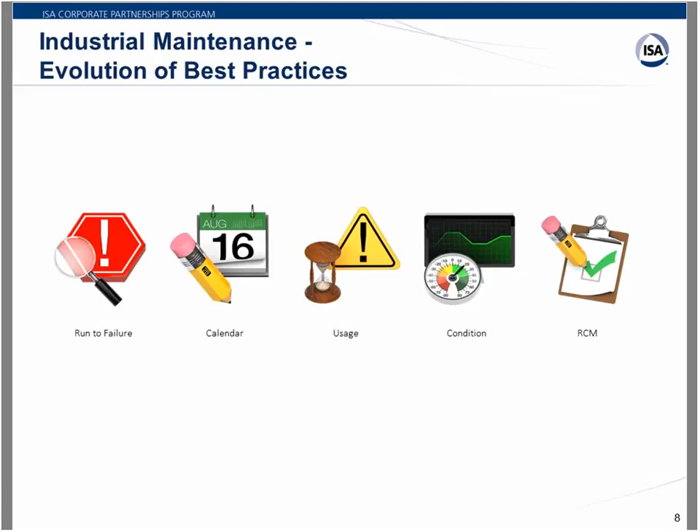And then you have the reliability-centered maintenance, which is a very thorough, very professional consulting engagement for an asset. It's proven to be effective. But I will maintain that all these fall short of the goal. And the goal for anybody running an operation with assets is to have those assets never break down in an unpredicted fashion, because it's very disruptive. Well, to date, that has not been achievable.

All right, so just some observations from other companies. Boeing has gone public saying that 85% of the equipment fails in spite of calendar maintenance.

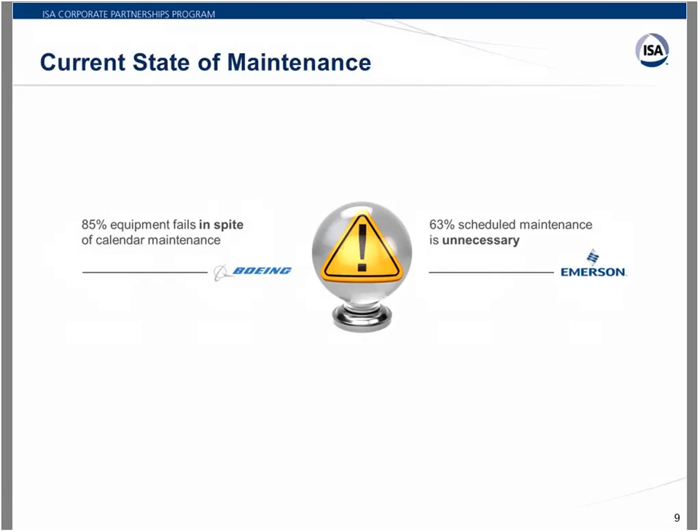Emerson's gone public saying 63% of scheduled maintenance is unnecessary. So you're scheduling it, but you're over-maintaining it because either the usage isn't there or the asset's not ready for it. So lots of room for improvement.

So along came advanced analytics back about 10 years ago, and it showed a lot of promise. There's some downfalls to it though, and this was my experience when I left back in 2014. This is what was available, and some of you attending may have experienced this and maybe haven't seen what's new out there.

But basically, the downfall with historical advanced analytics without any artificial intelligence embedded into it is, it takes modeling. So you got to determine what's the best statistical model to use and method. That took a data scientist, and the data scientist was heavily dependent on a domain expert of the asset to be able to guide them to what's normal and what's not.

Both those individuals are usually very hard to get a hold of, they're very in high demand. So scheduling their time is difficult, and it takes up a lot of time. And then when they're done, you got to configure a pretty complicated rules engine to take their findings and put it into a product.

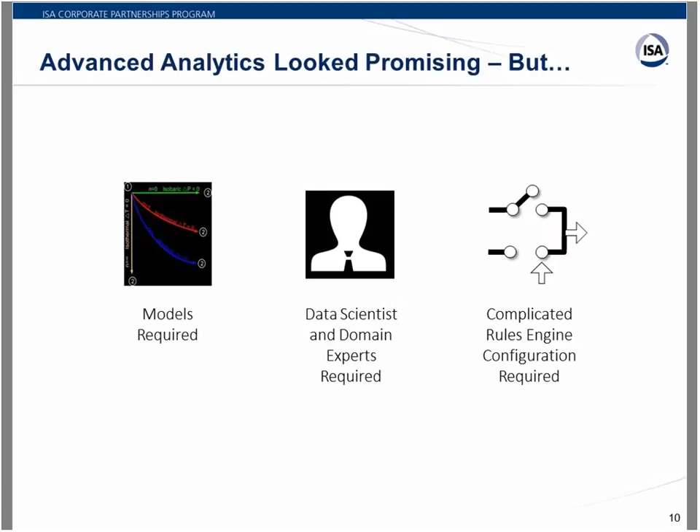All right, so pretty interesting, but has a lot to be desired.

So here comes our first polling question. I'm very curious to know if any of you have tried a preventive maintenance solution in the past, or if you're currently using one. And then if you have, how satisfied are you? Do you think it's met its ROI to date? I'll give you about a minute here. I know in my previous experience, a lot of times these predictive maintenance solutions have fallen short.

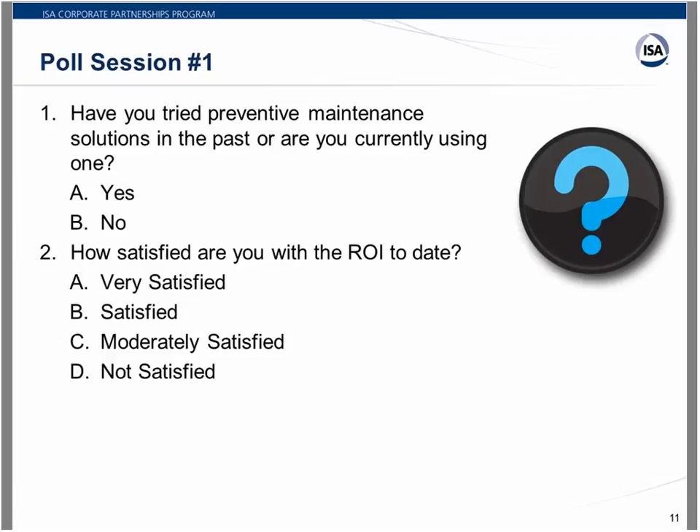And there we go. Interesting. So, yeah, I think that's pretty much par for the course there. So very good. Based on that, I think you're going to be very interested in what I have to say in the coming slides.

Okay, so let's talk about change enablers. There's been a lot of change in this arena. So what's driving it? Well, the obvious one is just the competitive natural forces that's in all of us who's in business. That's why you're attending this webinar. I would think you're trying to find ways to be better, to get a leg up on the competition.

The software vendors and solution OEMs that develop these predictive maintenance solutions are no different. They're always looking for the next way to get one up on the competition. So there's a continuous drive to be better, quicker, faster.

Then you have the whole Internet of Things, and the Internet of Things, it's real. So just think about it. The sensor networks are so much better, faster, robust, secure now. All sensors pretty much come standard, ready to be plugged into a sensor network. So networkability of those sensors is much quicker. Smart devices, all the instrumentation nowadays, panel meters, flow gauges, whatever, they usually come with the Ethernet port on them, where you just plug them right onto the industrial Ethernet network of a facility, pull data back.

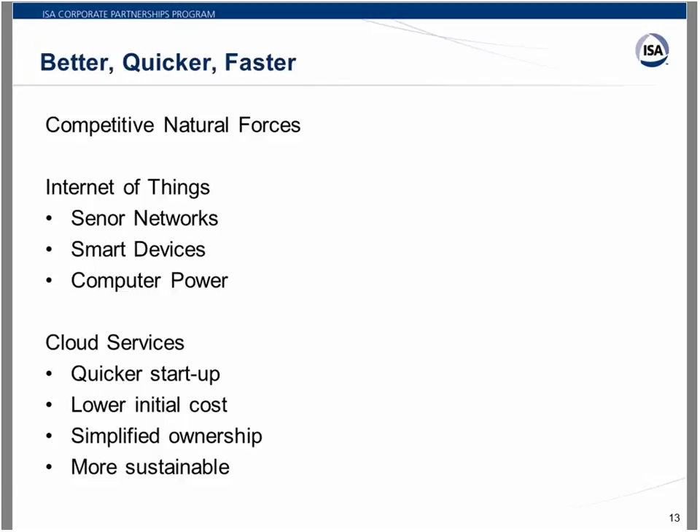You take that and you couple it with artificial intelligence. So the technique that we're going to be focused on, and has been the deliverer of the evolution I'm going to talk about here, is machine learning. Machine learning, if you don't know much about it, is the top AI technique used in advanced analytics.

When the young, bright data scientists come out of universities nowadays, machine learning is the number one technique they have in their back pocket to go apply to the world they're about ready to enter. And the number one contribution of machine learning for predictive maintenance is pattern recognition. We'll talk about why that's so important in a little bit.

And to give you some insight, this machine learning technology is used by Google for their self-driving cars. It's used in all the voice recognition software, the contemporary voice recognition software, Siri being, I think, the most recognizable one. It got its teeth cut in credit card fraud detection applications.

And this next bullet is what really surprised me. This isn't a few global conglomerates, the big analytics companies, who have these in a vault—when I say these, the algorithms, the AI machine learning technology. On the contrary, it's publicly available in the public domain, and all the data scientists coming out of universities have it in their back pocket.

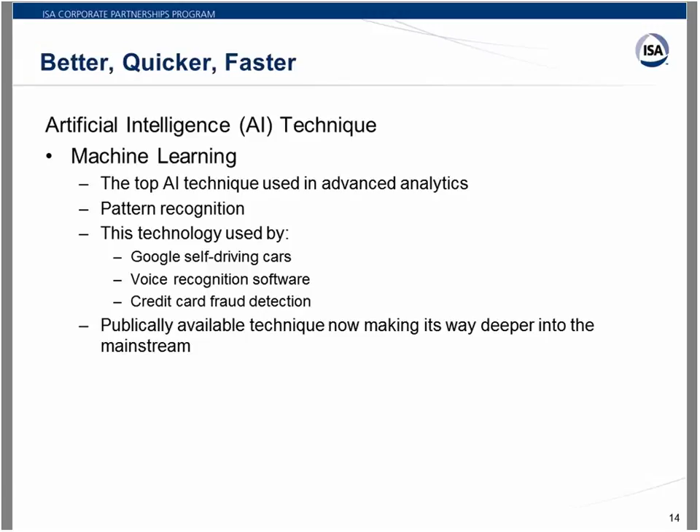If you do a Google search on it, you'll find a Machine Learning for Dummies book with algorithms published right in the book. So it's just amazing. This technique is making its way into the mainstream in a big way, and it's here now. Which leads us to the next evolution.

With AI, as it makes its way into predictive maintenance, it's here now—these solutions are available today. With these solutions, you don't have to determine the data model; it does it for you, or determines the actual statistical model to be used. You don't have to have a data scientist and a domain expert studying the data to figure out where the anomalies are.

It self-discovers the anomalies. And thanks to software as a service and other bundled solutions, there is no rules engine to configure—it's done for you. So it's a much simpler way, and it's a way that will give you richer results than what has ever been achievable before.

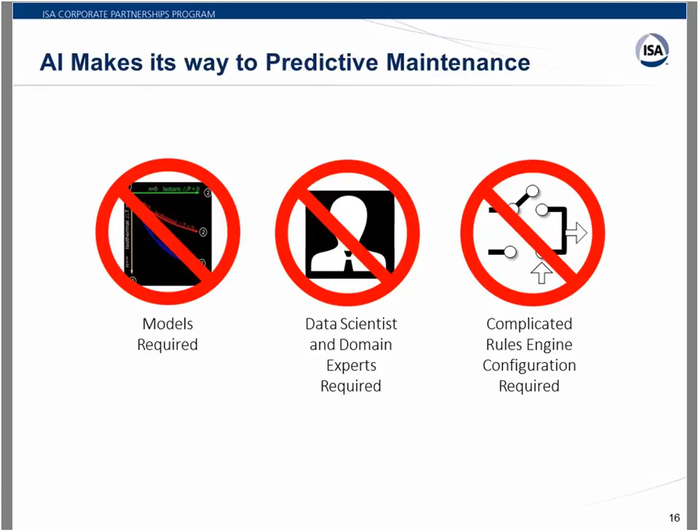These sensor streams are typically brought into what's called a process historian—a platform out there, OSI Pi, AspenTech IP21, Factory Talk Historian, Proficy Historian. If any of those names ring a bell, that's what the historian, the process historian layer, is doing. It's taking that sensor data in and time and date stamping it.

Then you have the maintenance records and the maintenance history. That comes from the computerized maintenance management system, or CMMS, as it's called. These are like the Maximos, the SAP PMs of the world. Avantis is another one that's popular out there. So it takes the maintenance records of an asset.

What is the work order history? It goes out and finds the corresponding sensor data for that work order time and history, and the past data leading up to that work order. It combines it, analyzes it, and then presents it when a predictive event is detected.

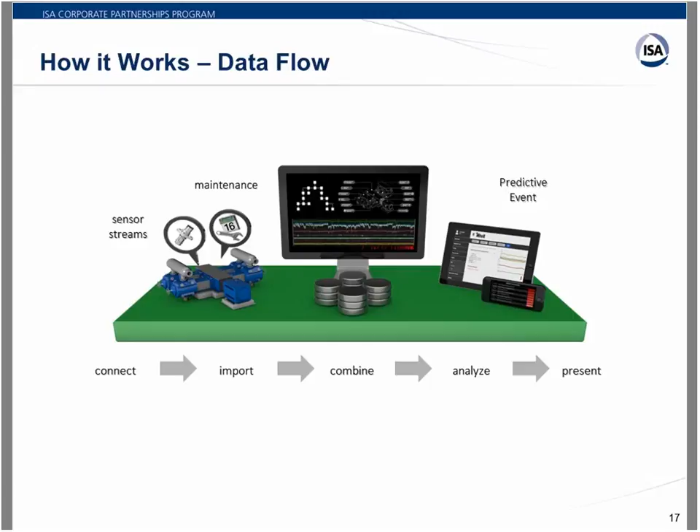Hopefully that's easy to get your heads around as to how that happens, and we'll talk about it a little bit more in the coming slides.

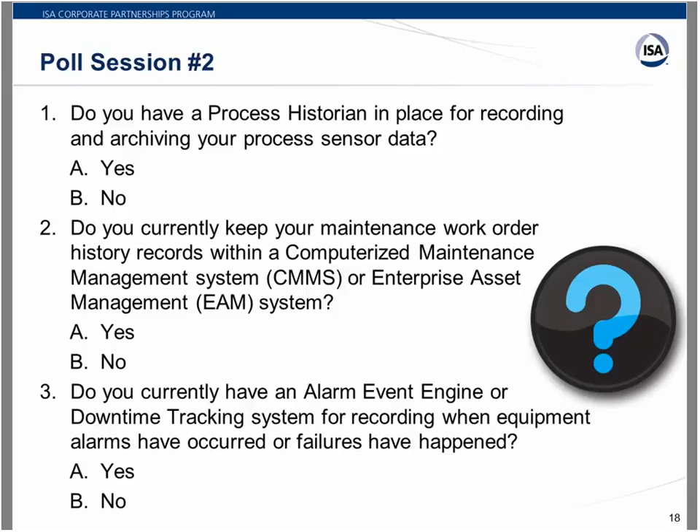Okay, so just going the next level deeper as to how this works. So you have agents, and the concept of an agent has been around. The traditional advanced analytics solutions have this, but this takes it to the next step. You have these agents, and they're autonomous. So you have two types of them. You have a failure agent.

This is an agent that watches for a pattern that's already been identified, based on historical data, as a recognized failure condition. And then the real...

...differentiator here, in my opinion, is the anomaly agent. So now you have an agent that continuously monitors the data signature of the asset, and it's looking for an anomaly. It's looking for a pattern that's not known. So it's not normal, and it's not within the recognized failure patterns. It's something outside of those known patterns. And that's where you have the continuous learning of an asset. All right, it's key.

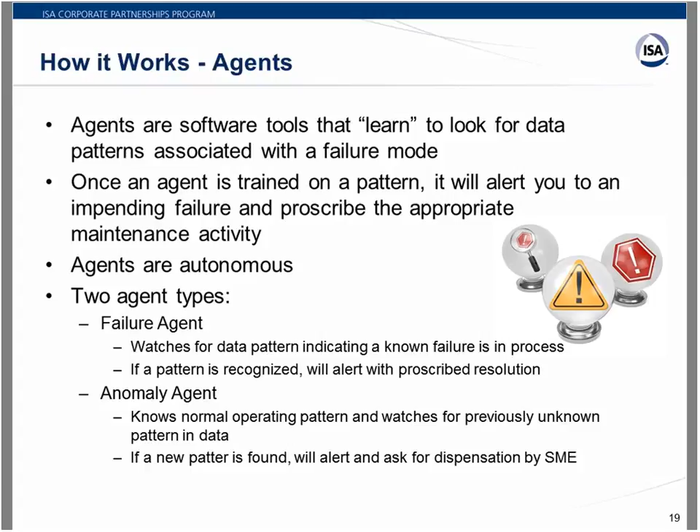So going back, next level down for how it works: the technology has to learn the patterns. What it does is go back into that work order history or downtime history, and the more history you have and the more events that are the same throughout that history, the better. This particular example is showing that the data shows two instances in history, once in 2013 and again in 2014, where this occurrence, this downtime disruption happened. So it takes that and learns from that data.

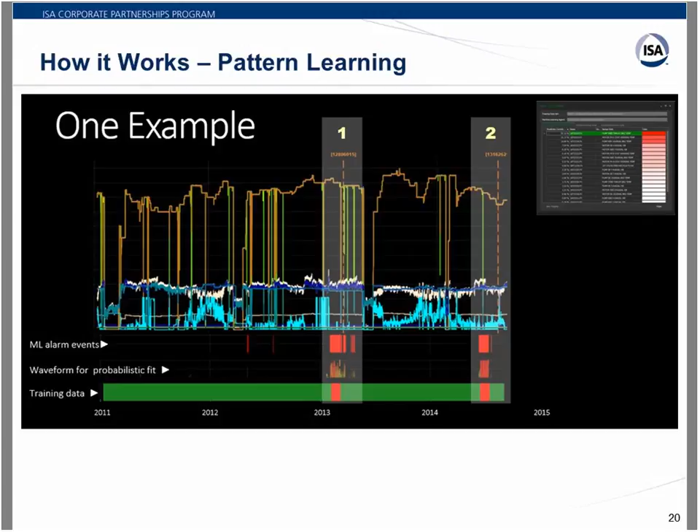And then from there, it can watch for that data, and there are simulations that will test it to make sure it repeats the pattern it will detect. The exciting thing is the advance of the detection. There's up to a 30-day notice that this technology is capable of giving.

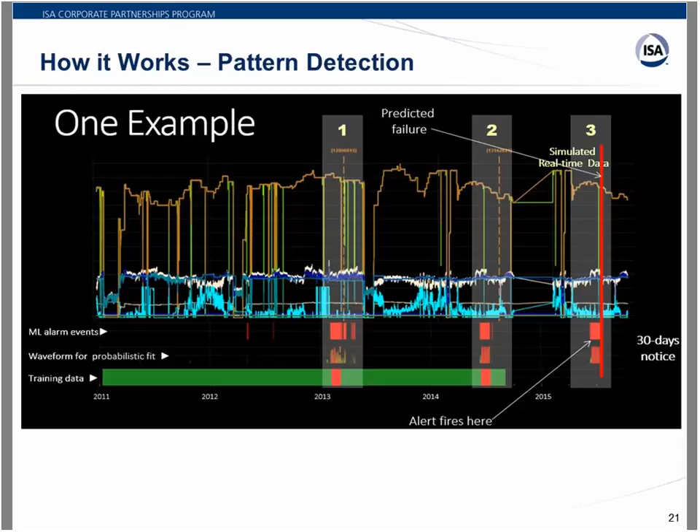Absolutely phenomenal. So if you look at why these agents are important: the old way is a single sensor. This is the maintenance paradigm of condition-based maintenance. You're looking at a sensor, waiting for it to tell you when it's ready to go.

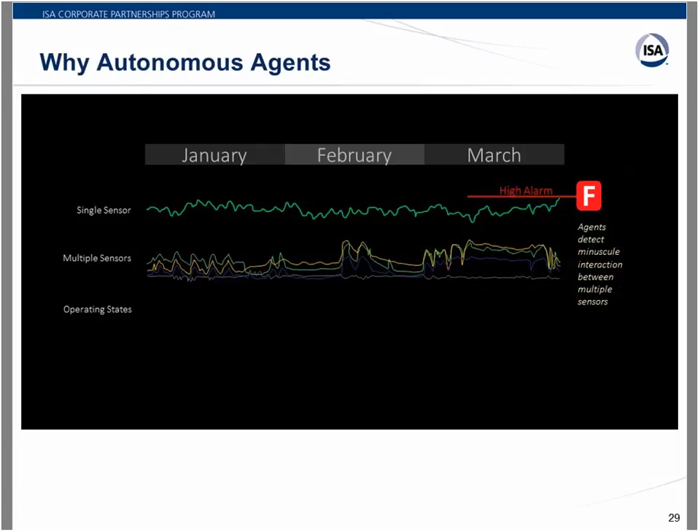But with anomaly agents, you can look at multiple sensors and detect minuscule interactions between them. And that's what gives you the advanced warning. And if you want to close the loop, you can actually tie this technology into your maintenance management system to automatically issue a work order.

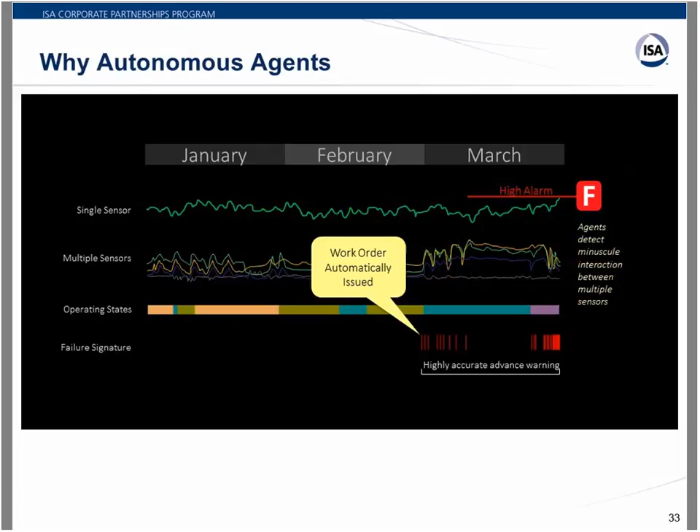So think about it. What does that mean? Well, the sooner you can detect, or the earlier you can predict a failure, the less costly it is going to be to repair it. If you're waiting for it to get close to failure mode or into failure mode, you're most probably disrupting your operations, stopping production in an unscheduled manner.

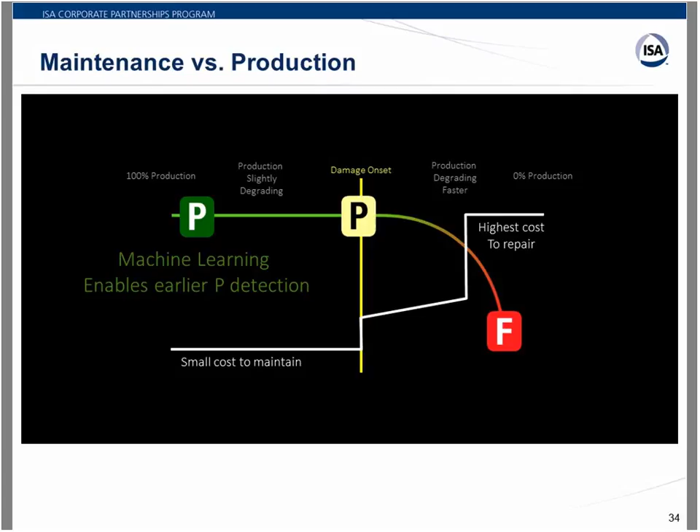You're most probably expediting parts, maybe even expediting a service provider to come in and help fix it, or maybe the original equipment manufacturer—all very costly. Just think if you could have a 30-day window as to when that's going to happen. Well, now you can schedule it and get everything staged, and life becomes far easier, as I think you would agree.

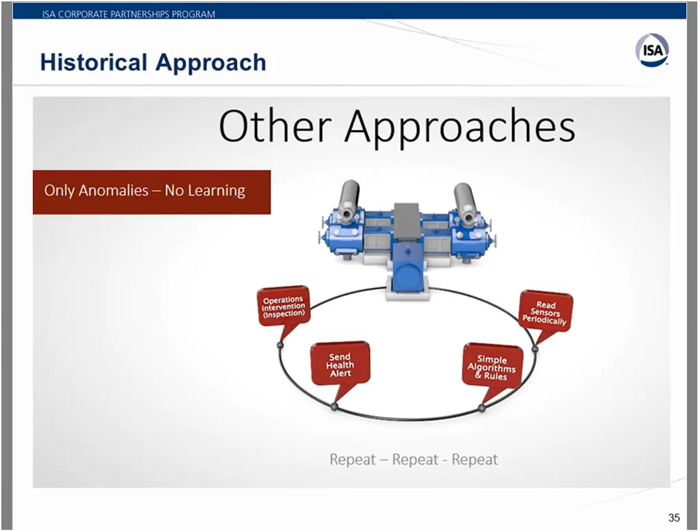Okay, so staying with the historical approach: the traditional way is you develop an agent, and it just continuously looks for one pattern—one pattern that the data scientist and domain expert has discovered—and it's going to sit there and monitor for a known, fixed set of data patterns. All right, that's cool, it's got value, but there's an evolution.

Next, there's a better way yet. When you look at the machine learning difference, now it's continuously monitoring for previously learned normal. So it's always looking for normal, making sure that the asset is in normal operation.

Then when it sees a deviation from normal, it starts comparing against known failure signatures. So if you have a known failure signature, you have sent out an alert well in advance, and operations can intervene in a timely fashion. So you're fixing a small problem before it becomes a really big problem.

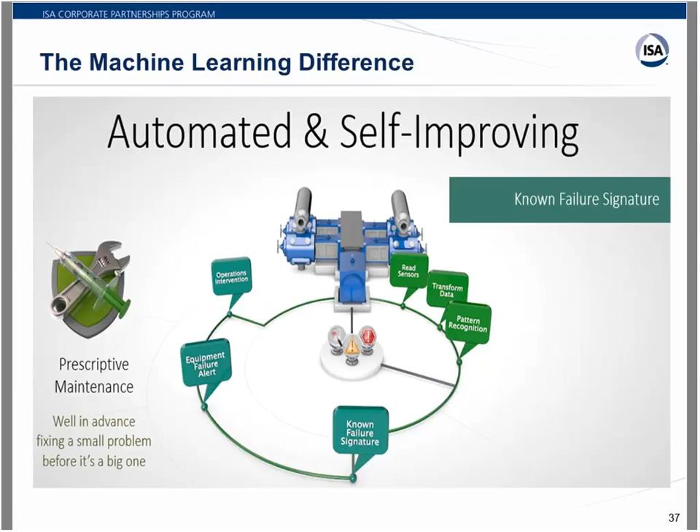But get this, it gets even better. Now with this anomaly agent, it's sitting there and it's looking for unknown anomalies. When it sees one, it sends out a health alert and requests an inspection.

So an asset expert, usually someone in maintenance or an asset reliability engineer, will go out, take a look at that asset, and confirm that it's something unique that could lead to failure, or maybe it's just a new operating pattern and it's fine. If that's the determination, which this illustration is showing, then they just retain that pattern as a normal operating pattern.

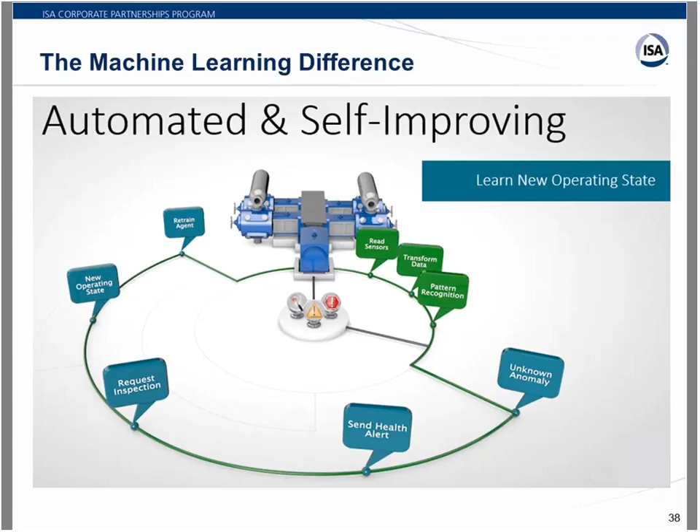But now, what happens if it determines something? The asset specialist goes out there and finds out, hey, this is something new, and yeah, this is going to lead to failure. And this is going to be a new failure pattern to add to our library that the agents can continuously monitor for.

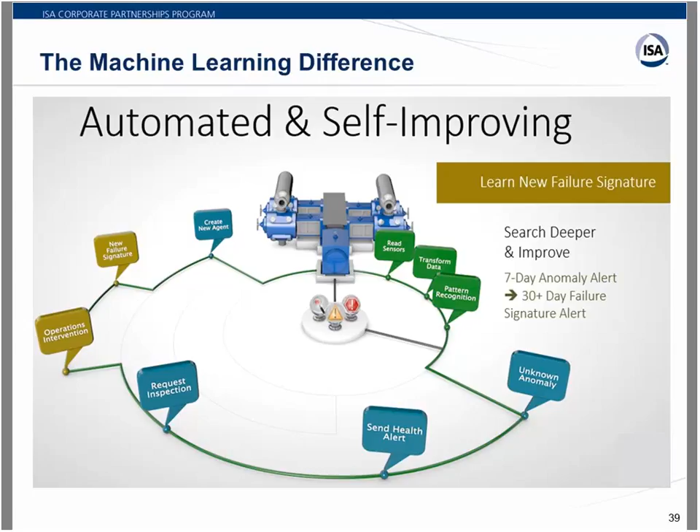And the cool thing is that this is giving you a 7-day alert. Once it's defined as a known pattern, you'll get a 30-day failure signature alert from that point moving forward. But you can see how this technology allows you to continuously learn and get better at this predictive capability.

So you can deploy as many of these agents as the technology detects signatures on. Each failure signature requires a new agent. The cool thing about this technology is you can also go upstream and downstream of the process of your sensor stream. So now you can look at the incoming effect of maybe material or flows, or the downstream conditions. You can cast a wider net for these data agents to look at.

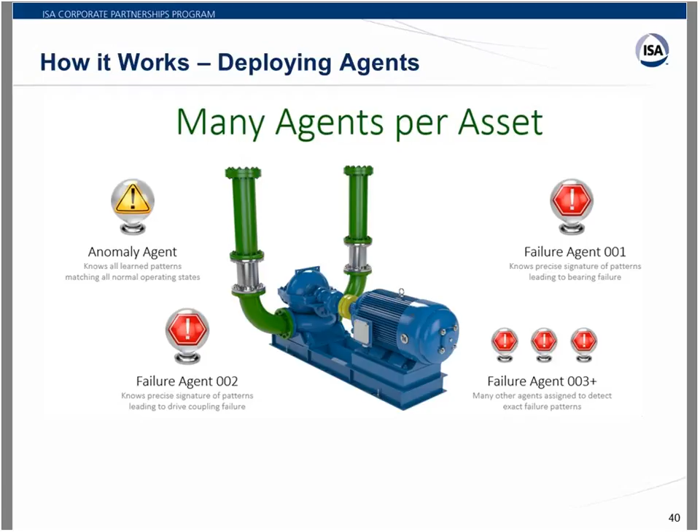And the other thing to think about is when you have a fleet of similar assets, this is where it really becomes attractive, because you can really capture a lot of ROI. You're making all your investment up front on the one asset, but now you can take these agents and propagate them across your fleet for monitoring of the entire fleet.

Which leads us to our third and last polling question. I'm very curious as to how many of you have got similar asset types that can be grouped in as fleets, or are all your assets individually unique, or do you have some of both?

Again, depending on the cost of the asset, the fleet approach has the best bang for the buck, but if you have a very expensive single standalone asset, this also has its value as well.

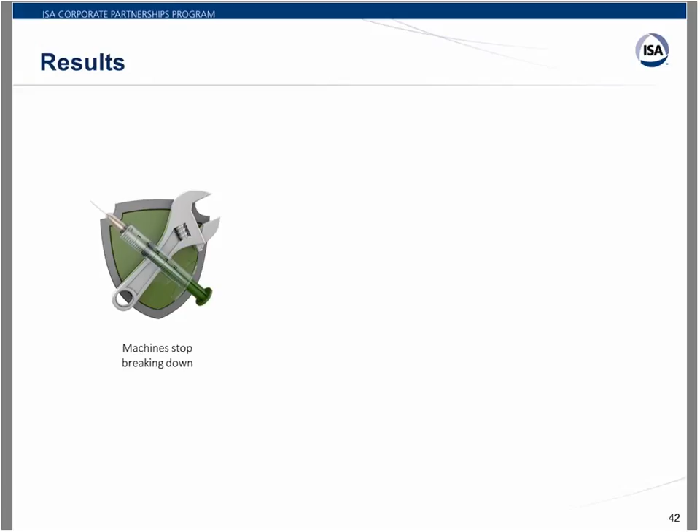Machines last longer because they're not going through dramatic breakdowns. Your net output increases dramatically, so your operations gets more profitable. And your maintenance costs decrease dramatically. That's what we're all about here in the maintenance world.

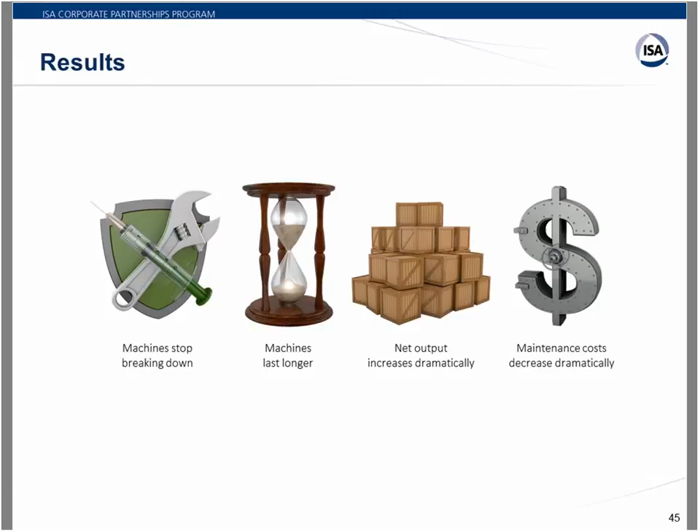So, case studies. Let's talk about some interesting insights from what other companies have done. I'm going to start out with the real big assets and then work our way down. So the first one is a locomotive company. Locomotives - the number one, the biggest thing in the locomotive is the diesel engine. These transportation companies, when they have a failure of a locomotive in operation, it is an extremely expensive event.

From what I understand, it's like a couple million dollars per event, because you have to send 2 locomotives out - one to pull the old one away, the other one to hitch up to the freight and continue hauling it. But the real expense comes in the penalty that the line owner issues for holding up operations - an extremely expensive fine. So this locomotive company was experiencing these downtimes, in-line in-service downtimes. They engaged a couple of well-known analytics companies to come in and basically start up what they called a science project.

This was the data scientists and asset professionals pouring over data, seeing what they could find. From what I understand, it went on for a couple years, and the results were less than impressive. This machine learning-based technology was deployed, and in 7 days was able to discover more anomaly patterns and insights than the other two companies did in a couple years.

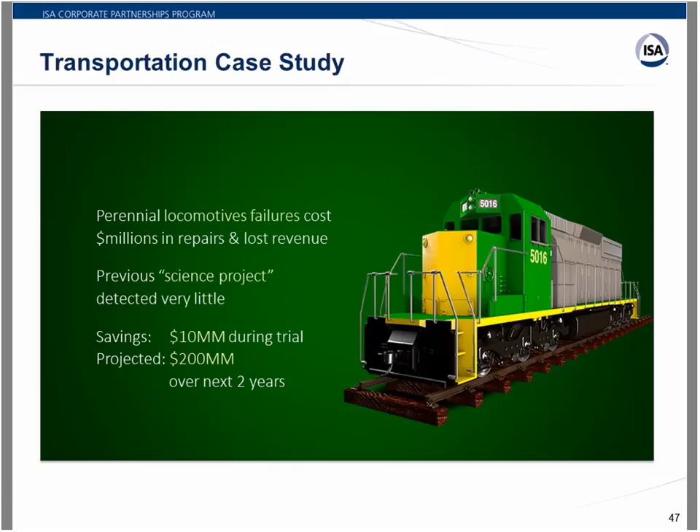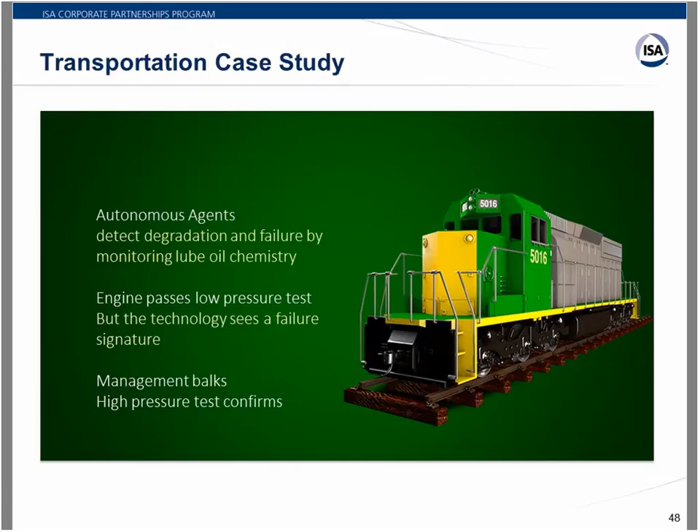The autonomous agent detected a degradation in the oil chemistry, and they were saying, 'Hey, this is going to be a problem here.' The technology saw a failure coming. Management kind of balked, like, 'Here we go again, another science project, erroneous prediction.' But just in case, they went ahead and ran a high pressure test to see if it validated. They ran it, and the high pressure test confirmed that there was going to be a pending failure. So this was very impactful, and this company is enjoying great success.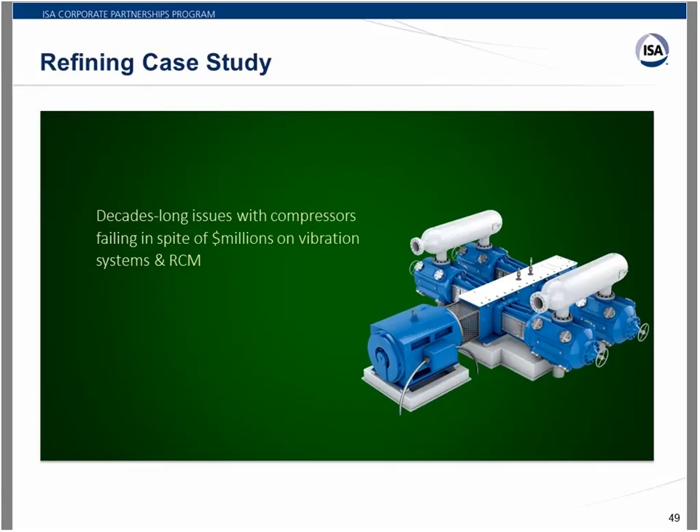Next one down, not as big an asset, but a very popular one: a compressor on an oil pipeline or gas pipeline. They've had decades-long issues with these compressors, despite millions of dollars spent on vibration analysis and RCM studies. They still were experiencing downtimes. So they brought in this technology.

It cast a wider net. Not only were they looking at sensors on the compressor, but they were also looking upline and downline, at the intake and outlet. The technology was able to determine the root cause: basically liquid getting into the compressor from the upline material flowing in. The chief rotating engineer made a statement about how you just didn't have enough people to execute this kind of level of monitoring and analysis that these autonomous data agents do.

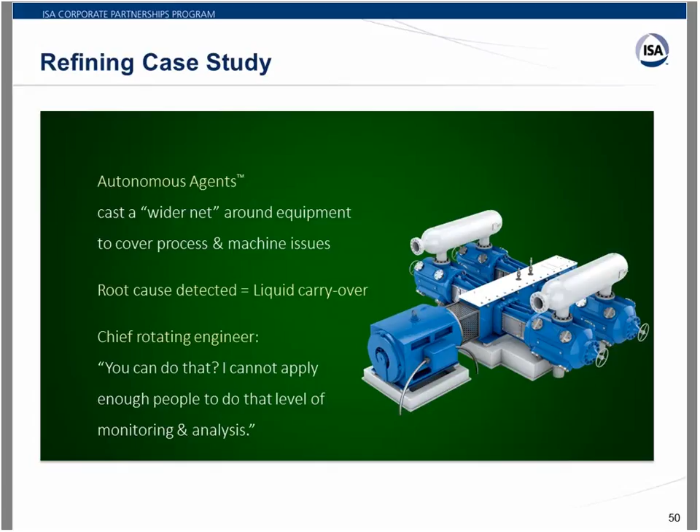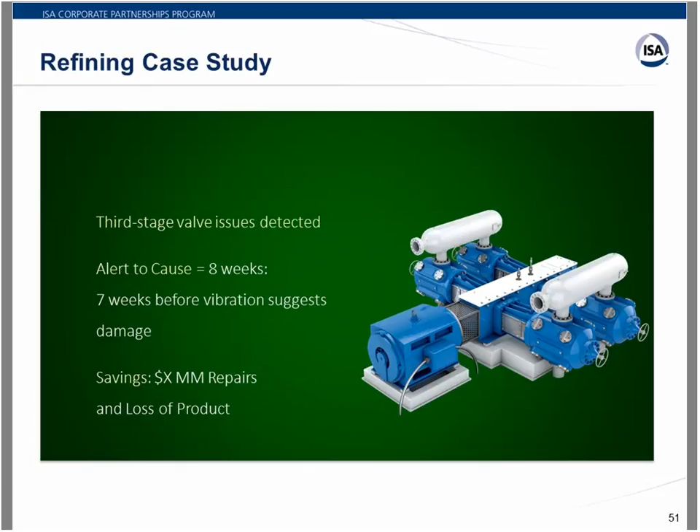On the same compressor, same company, they were able to determine a third stage valve issue. It gave an alert 7 weeks in advance of what the vibration detection equipment was suggesting. So millions of dollars of savings in repairs and lost product.

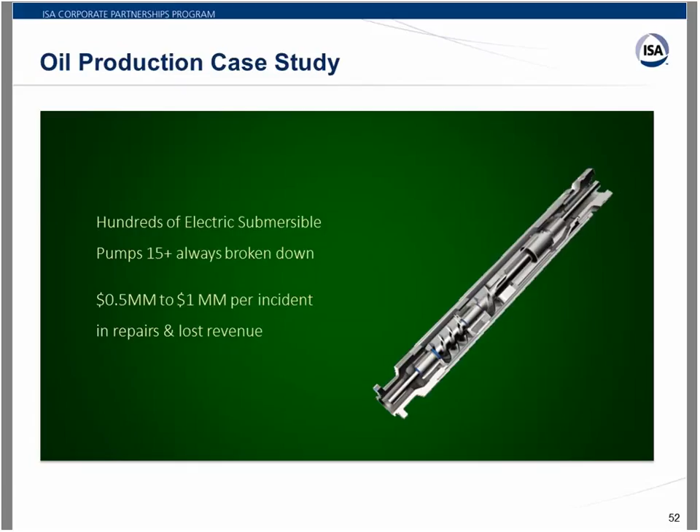All right, third and last use case. This is going against a smaller asset: an electric submersible pump. This particular company was pumping oil, and they were having a lot of breakdowns. They have a big fleet of these things, like 400 of them in the ground across the country. Every time one of these breaks down, it's like a $500,000 cost in repair, and since it's oil, if it spills, it's a very costly environmental impact.

So they brought in a couple companies. One of our partner companies was asked to participate, and they were able to beat out their competition by a large margin in the number of faults they were able to detect, and in the clarity and detail the technology was able to provide. They did an online trial with 18 pumps. It's been very successful, and they're going to roll it out to the other 400.

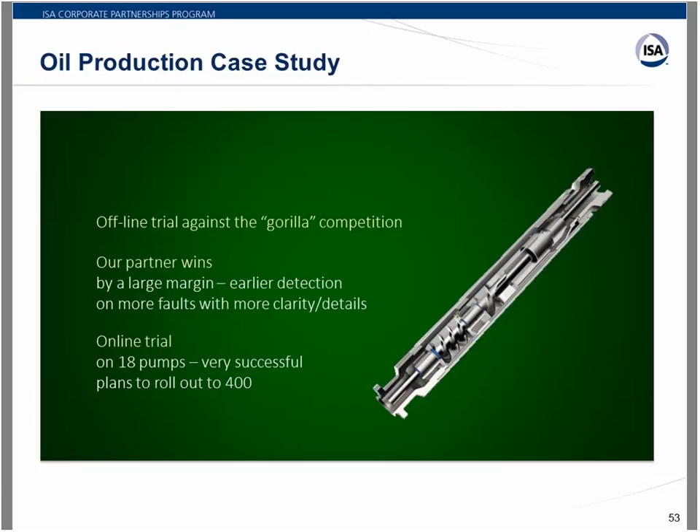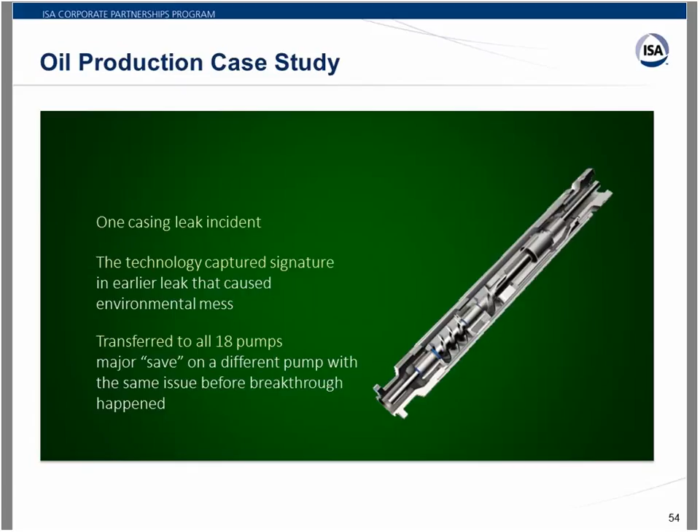The success they initially are seeing is around the cause, or the data signature, leading up to a cracked casing. A casing leak is an extremely costly failure because of the environmental mess it makes. The technology has determined what that data signature is. It's a major save, and they're rolling it out to the rest of the fleet of pumps. So hopefully that gives you some insight into the dramatic results these machine learning predictive maintenance solutions can have. And with that, I think it's time for Q&A.